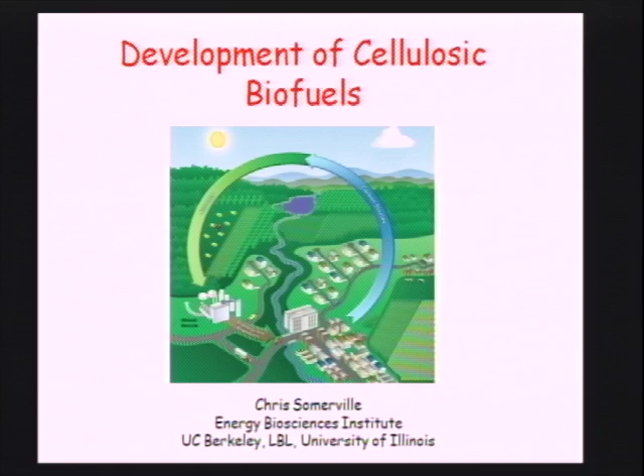All right, well, I'd like to just begin with an introduction to the EBI. EBI was founded here about 3 years ago now with a $500 million commitment from BP, and the organization from the founding involves 3 other partners, Lawrence Berkeley Lab, University of Illinois, and UC Berkeley. The mandate of the EBI is not actually entirely biofuels. It's broader than that, and it's to explore the application of modern biological knowledge to the energy sector.

And at present, when we began, we already had a pretty clear idea about cellulosic fuels, and that currently is the dominant thing we do. But we have other interests such as petroleum microbiology and biolubricants and biomaterials and pipeline corrosion and other things that we hope to eventually get to.

The EBI, although it was born in quite a bit of controversy here, has actually been a very popular activity when it comes down to participation. My administrators tell me that we've had 770 people on the payroll of the EBI in the past 3 years, including 150 faculty. So if we subtract 150 from the 700, I think that indicates there's about 100 undergraduates and about 400 graduate students and postdocs are or have been involved.

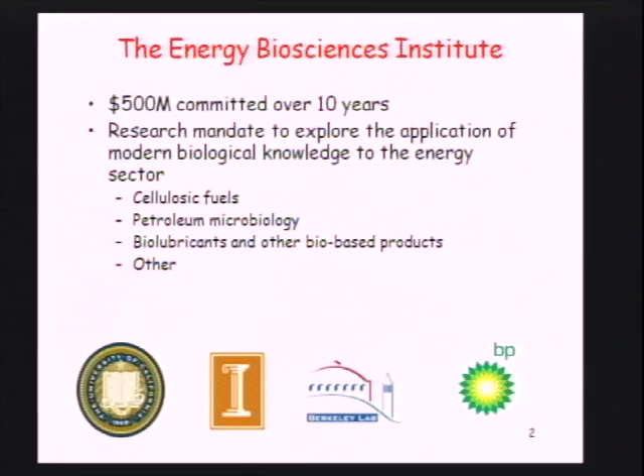So what I'm going to do is give you a little indication of a few slides about what our interests are and some of the things, but of course it's impossible for me to actually describe everything we're doing. It's quite a large activity.

One thing I can say, though, is strategically, and I'm only going to speak about the cellulosic fuels aspect of it, the way we've approached that mandate is that we could have focused on a few key issues and really put a lot of resources to try and solve the key issues, but instead, we've taken a broad view of the overall problem, or the overall opportunity, I guess I could call it. So we are trying to advance a whole system analysis of what might be involved in making next generation biofuels. So we have, as I'll show in a few moments, activities ranging from economics through agronomy and microbiology to chemical engineering.

I think I'll go through this somewhat quickly in view of some of the other talks, but I just did want to remind everybody that energy use is expanding very rapidly, and transportation, which is where fuels come in, is actually a fairly small piece of the overall expansion. It's just 20%. So whatever we do in terms of making low carbon fuels is going to be at most a 20% solution.

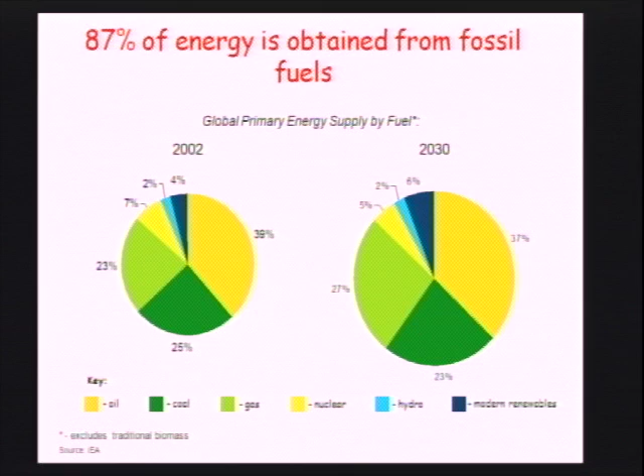This is actually the motivation. I think long term, it's apparent that as energy use grows, our solutions are going to have to include, to a large extent, solar solutions.

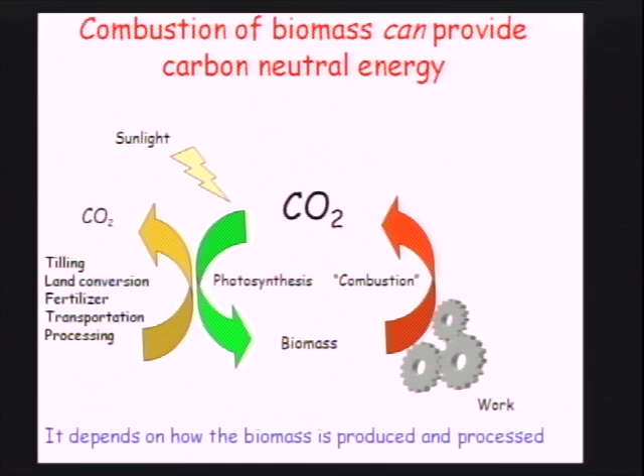So actually, it very much depends on how you do this as to whether it's carbon neutral or even a net gain energetically. And this is certainly one of the reasons why we have a pretty big activity in environmental and life cycle engineering.

So today most biofuels are made by one of two processes. The most advanced in some respects is the sugarcane process, in which sugar is fermented by the same yeasts used in the beer and wine industry for probably 5,000 years. And then the fuel is distilled to dry it and you produce a product. So Brazil produces today 40% of their transportation fuels on only 4 million hectares of land.

The corn process came along a bit more recently. 65% of a corn grain is starch, and that's just a polymer of glucose. So the process just has one more step, basically: the starch is usually gelatinized by boiling and then converted to sugar, and then the process is the same.

Those are mature processes. It doesn't mean there's not opportunities for some innovation there. For example, the drying is currently done by distillation, which is quite energy intensive. And it seems some of the things we work on may ultimately be relevant. For example, it might be possible to develop either liquid-liquid separations for constantly removing fuel from the fermentations, or some membrane process. There's various possibilities to improve some aspects of this.

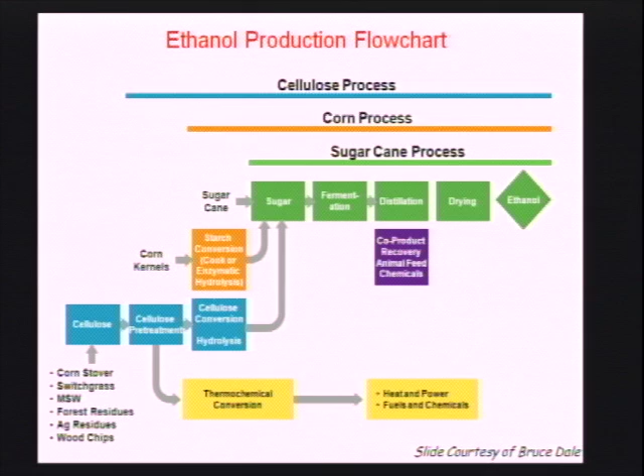Okay, so there's a lot of issues in this, and in the case of cellulosic fuels, probably the most controversial and in some ways the most challenging question is actually not this conversion process, since it's very similar to existing processes, but actually where one is going to get the biomass. And in general, this slide shows something a bit more complex, which is that, as I already mentioned, there's lots of complexities as to whether it's done well.

So in addition, the feedstocks is a big one. That is, depending on how you produce them and how much energy and other inputs go into the production and the transportation, you can either do it well or you can do it badly. There's a lot of discussion about that.

Obviously, agricultural practices trigger an enormous amount of controversy. Let us say the use of nitrogen fertilizer in the corn industry. A lot of that nitrogen fertilizer runs into the Gulf, creates a big dead zone. That's generally considered biofuels done badly. The question is, can it be done better? And so on. There's process optimization, obviously, greenhouse gas and energy balances, economic factors, and ultimately, you have to produce a fuel that meets the goals.

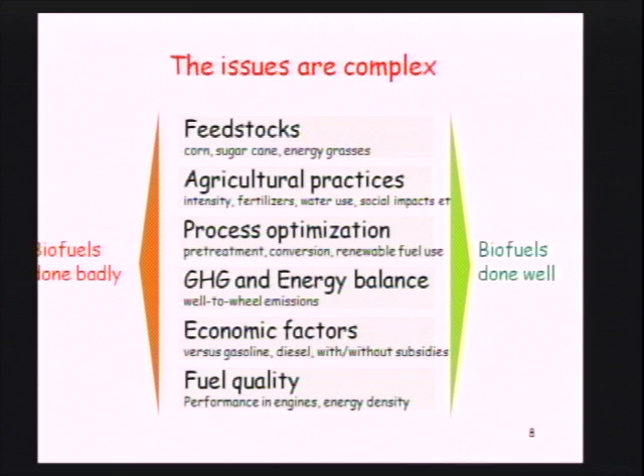And as you can see, probably that involves everything such as what we call biotic risk, that is, pests and pathogens, which can be very destructive. In fact, in Africa and Asia, about 40% of all agricultural product is lost to pests and pathogens. So that's an important efficiency factor that one might not normally associate with biofuels, but actually it might be a make or break as to whether biofuels can really work long run. And of course, there's all kinds of issues with transport and storage and related things.

Then once one has feedstock, the next bucket of problems is associated with converting the feedstock to something that can be subsequently converted to a fuel. So there's kind of two baskets of technologies associated with that. And so it leads to actually a very complex series of technologies that have to work together.

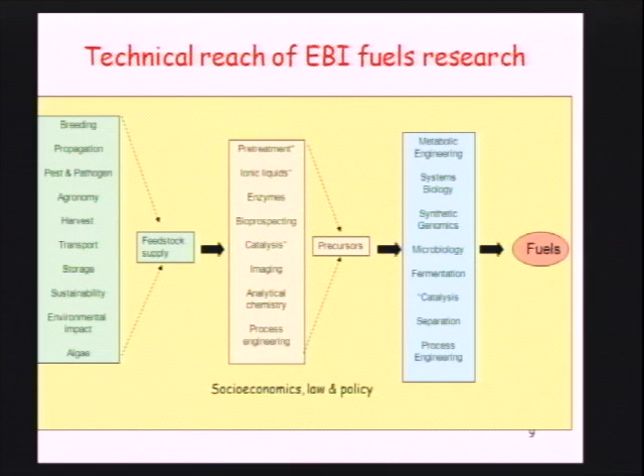That's a mile by a half a mile, where we've established large plots of candidate species ranging from mostly perennial grasses all the way to trees. And in fact, we have relationships with 30 botanical gardens around the world who are sending us candidate species that they think might be interesting.

Additionally, we have 19 more sites now around the United States where we're planting candidate species so that we can examine their production, the issues associated with their production, but also their biotic and abiotic stress responses and their effects on the local environment, including soil, water, and gas.

Now, there's many species that might be interesting. One of the interesting things about bioenergy is that unlike food, all food production in the world is based on 140 species of plants that we've adapted over some tens of thousands of years. But there's 250,000 others that we don't use for food. And one of the nice things about bioenergy is that when you stand back and look at it from first principles, all kinds of new species pop up with good properties.

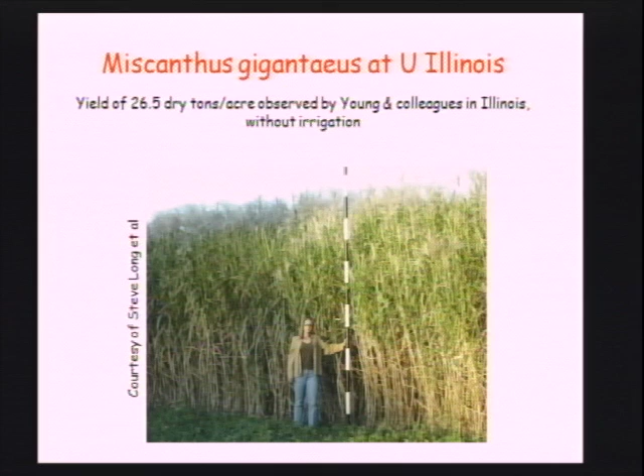It's cut every year at ground level, and on average we're getting about 18 tons per acre year with no inputs. So never been fertilized, never been irrigated, never been sprayed with anything, and shows no decline in productivity over that period of time. So this is very attractive to us for low input, high return. And we've invested quite a lot in this because it has a very broad range all the way from southern Canada to Florida.

This is a piece of data about Miscanthus in particular that's unusually interesting to us. What it shows is a 14-year study in England where there was no nitrogen, 60 pounds or 120 pounds per acre of nitrogen applied to the field, and every year all the biomass was removed from the plots. And you can see that over that period of time there was no response to applied nitrogen.

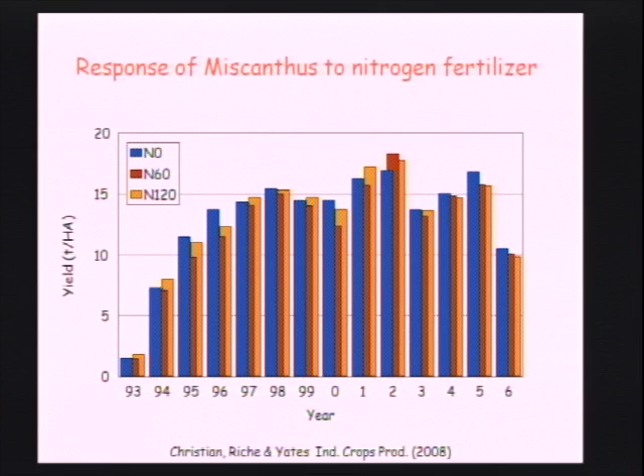And this reflects the fact that these perennial grasses have a growth habit that allows them to withdraw mineral nutrients from the biomass and store them in the ground in a big perennial root during the winter season. So if you simply wait until they've gone through that biological process before you remove the biomass, you don't remove the mineral nutrients, and they recycle each year. So environmentally, it's very attractive, and we believe very sustainable. There are plots in Europe now that are still yielding after 30 years.

To really understand the environmental constraints, we built the biggest and most comprehensive environmental monitoring system in agriculture anywhere in the world. So we have now at several sites, we're measuring pretty much everything that can be measured out in the field. That is all the gas fluxes, including methane.

Also soil temperature, moisture, but importantly, we've tiled fields and installed so-called lysimeters where we can measure the mineral nutrient efflux in the water table or in the drainage from these fields. And our goal in doing that is to understand the whole input and output of these systems.

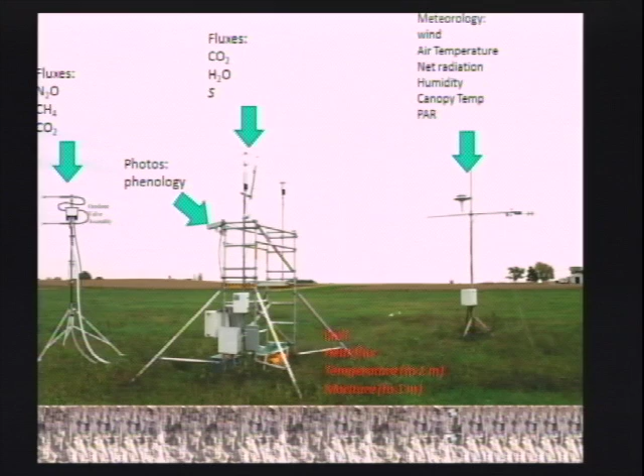And then we've planted all kinds of different potential crops on these fields. So everything from mixed prairie grasses to, we use corn as a control, something we know we don't want to use. So far, the results from these studies, mostly led by an ecologist named Evan DeLucia at Illinois, indicate that the perennial grasses are certainly very attractive in regard to soil carbon accumulation and lack of mineral nutrient runoff compared to conventional crops. So we think that all the evidence to date indicates that these are going to be sustainable and attractive relative to conventional crops.

And we actually envision them being used to remediate fields that have been farmed for a long time with conventional agriculture. I'm a little bit rushed for time, but I just want to point out that this is some data from Evan's studies showing that, for example, in this case, where grassland has been converted to switchgrass, their studies indicate soil accumulation increasing as the years progress. And in fact, we're doing these studies around the United States.

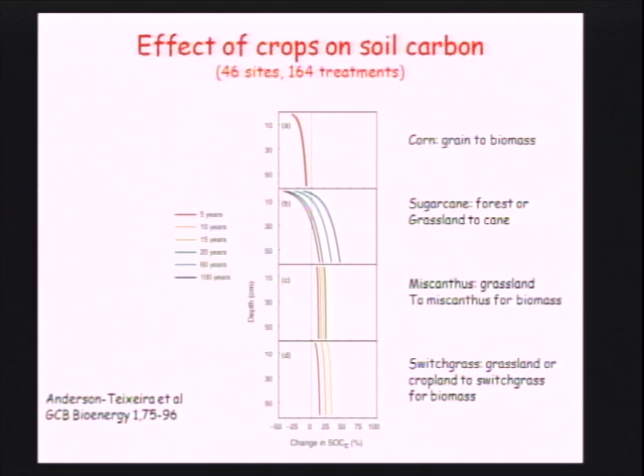One of the issues is whether there's land available, and our analysis suggests, well, I'm going to come to how much land is available. It appears to us that there's relatively large amounts both here and elsewhere in the world. So for example, in the United States, until very recently, we paid farmers not to farm 40 million acres as a mechanism to support the price of crops like corn and soybeans.

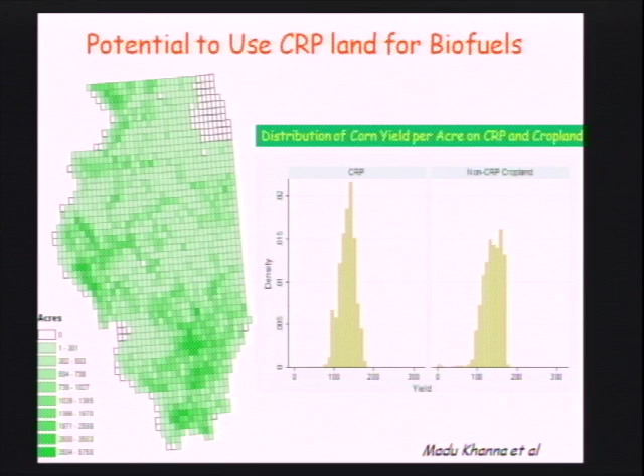And this land is actually highly productive, so there's a kind of a myth that somehow this is marginal land, and I just wanted to show that, for example, of the 1 million acres that we pay farmers not to farm in Illinois, the yield on those acres is about 127 bushels per acre versus about 140 for the prime farmland. So there certainly is quite substantial amounts of land available in this country, and I'll come to the world in a moment.

And in order to understand how much or which of that land might be suitable for us, an approach we've taken is biophysical modeling of candidate crop species. So we have highly parameterized models that use meteorological data, that is, insolation, water, wind, and temperature, as well as soil data. And we use 100 biophysical parameters that are able to model the growth of plants now very efficiently. So this is a model for

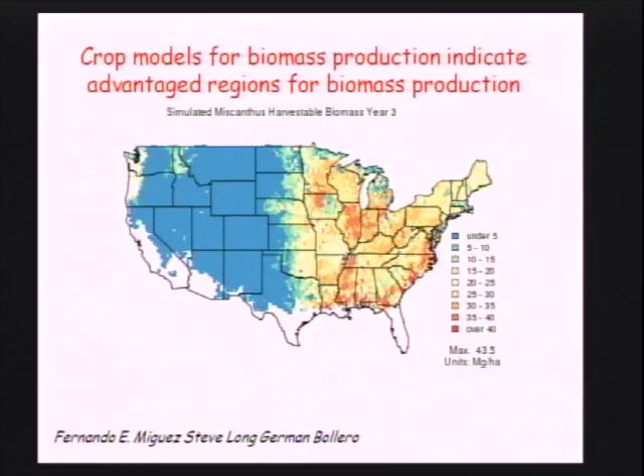Miscanthus, showing where the attractive regions are. And you can see, for example, along the Mississippi and in the southern states, it actually turns out to be very attractive. One really interesting thing is that you can see in Iowa, here it's very high, but here it's very low. So unusual, and we looked into that, and that turned out to be a place where the soil is rather shallow. And it turns out corn, which is the dominant crop there, thrives on shallow soil, but Miscanthus, as a perennial, has deep roots and doesn't thrive where the soil is shallow. It's kind of interesting. So anyway, this is very useful.

This model can be applied everywhere in the world where we're able to get the relevant meteorological and soil data. And it's very helpful for allowing us to see where the opportunities are and to estimate what the likely unfolding of the industry might look like relative to other demands for land and also relative to regional infrastructure and access to markets. In fact, we have a very large team of economists that take the data from the biophysical model and then build logistical and economic models on a spatial basis.

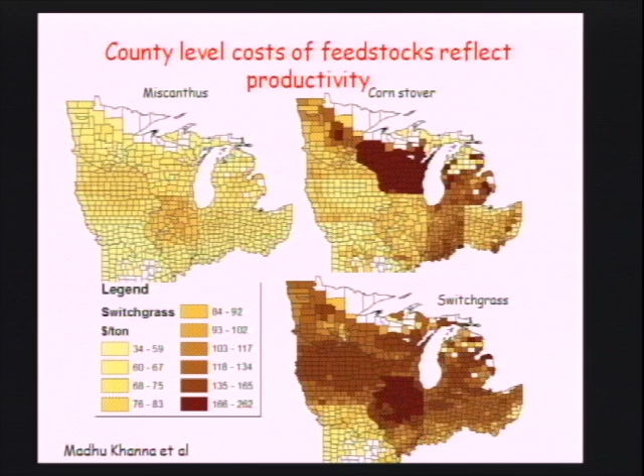Finally, in the context at least of economics, we have a number of economists and social scientists working with us also to understand the impact of devoting land for the production of biomass rather than food.

The long-term trend shown here in food prices is strongly downward, which is really a very important thing to understand, because from there to there, the world population doubled, and yet during that same period of time, all major commodities experienced a price decline. And that's related, of course, largely to improvements in both the agronomy but also in the genetics of the crop species.

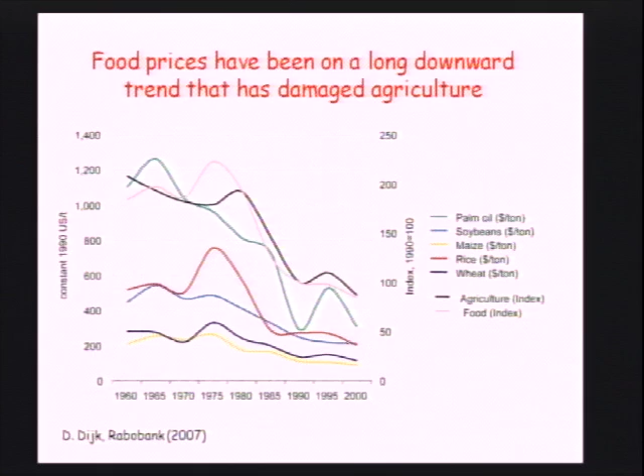So our big question is whether, if we start applying demand for land, that's going to impact this long-term trend and what the consequences are for at-risk populations. Our focus at Berkeley, at least, is not America. It's global, so we have similar questions everywhere in the world. We have particularly a focus on Brazil because it represents such a large opportunity.

In particular, as I mentioned, at present the Brazilians get 40% of their transportation fuels on only 4 million hectares of sugarcane. But the Brazilian government recently announced that they would allow the sugarcane to expand to 64 million hectares. So that will take Brazil, if and when they do that, to producing 400% of their transportation fuel. So Brazil, just on that basis alone, will become a very large exporter of fuels.

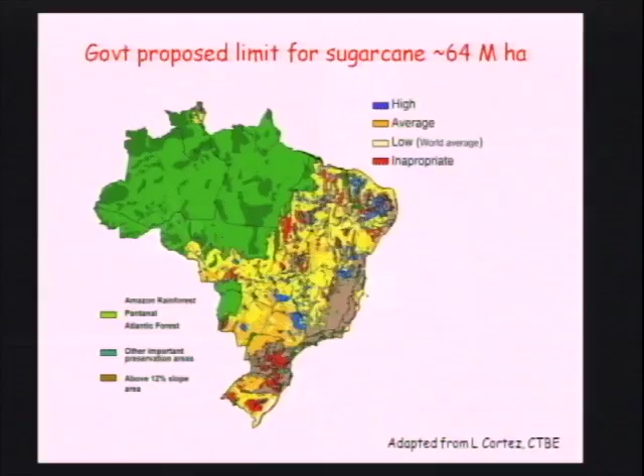At present, the Brazilians only use 14% of the mass of the sugarcane to make liquid fuels. They actually burn the rest rather inefficiently and export it to the grid to make electricity where they can. We believe some of the technologies that are coming along, and I think Jay Keasling will talk more about it than I'm going to, will allow us to actually use at least double that. So we believe in the long term Brazil could produce at least 800% of their demand for fuel.

Now, it always raises a question as to, well, is that going to impact the forest? And in fact, we have teams of students working down there because we don't think so. It turns out there's 234 million hectares of cattle ranching in Brazil. And in general, the cattle is at very low density, perhaps at least fivefold below the carrying capacity of the land. The Brazilians have used cattle to actually claim land during the land grab.

And so we're studying what's required to intensify cattle production to make land available for this projected expansion. And indeed, the government's designation of the 64 million hectares is based on that concept rather than further expansion into the Amazon. These are not things we're participating in. We're just trying to understand it as a factor in understanding the long-term trend.

More generally, some work from Chris Field's lab a year or so ago showed, based on some satellite imaging they did of land use around the world, that there's about 1 billion acres of agricultural land, land that has been used for agriculture, that has been subsequently abandoned. And there's all kinds of reasons for it. In some cases it's desertification or water problems. In the United States, it's mostly economic reasons for the abandonment.

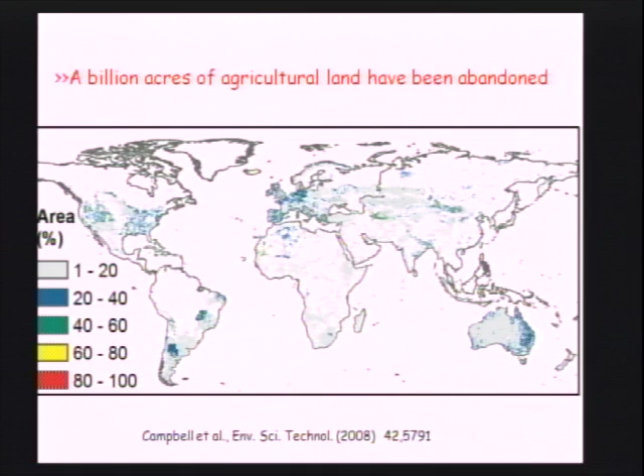Nevertheless, we're also trying to now get higher resolution understanding of where this land is, why it was abandoned, and what it means. And it's particularly attractive to us because where the land has already been used for agriculture, several things have happened. One is, in general, the carbon costs have been paid. That is, the carbon debt associated with converting an acre of native land to an acre of agriculture was paid sometime in the past. And secondly, in general, that land is not significantly required for biodiversity or ecological activities. Not always true, but it does indicate somewhat the scale of land that may be available. So we'd like to understand that in more detail.

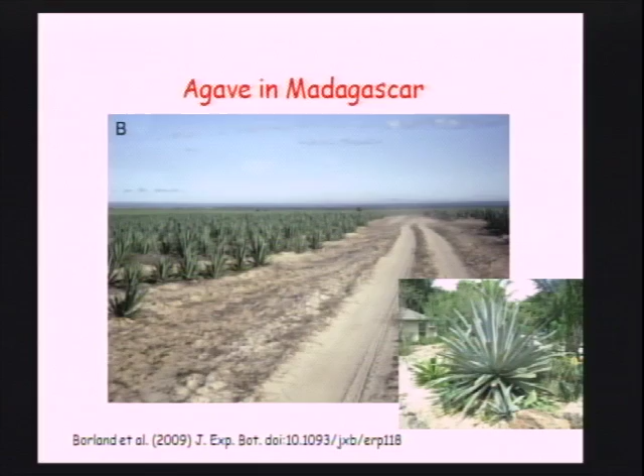Additionally, there's 5 billion acres worldwide that's too arid for agriculture. And so we've become interested in species that will grow on semi-arid land. So this is a very common plant around the Bay Area here, various species of agave. It's usually Agave americana here in the Bay. These species will yield about 10 dry tons per hectare a year on 30 centimeters of rain. And, as you know if you just look at the plants in our neighborhood, they will survive from approximately April to November without rain, extremely drought hardy.

So we actually believe these types of species may be suitable for energy plantations. This is actually a plantation used for making rope. This is Agave sisalana in Africa. So there's about 1 million hectares worldwide of several agave species. So we think that there are options in terms of land. We have not as yet tried to even identify an actual number as to how many gallons of fuel we could make with the land that seems suitable to us by environmental and societal criteria. But right now it seems like there's a very large amount, and so we're progressing.

I think I'm running out of time. How much time do I have? A couple of minutes? Okay, I'm really running out of time.

Well, we're working on storage and transportation. That's highly relevant.

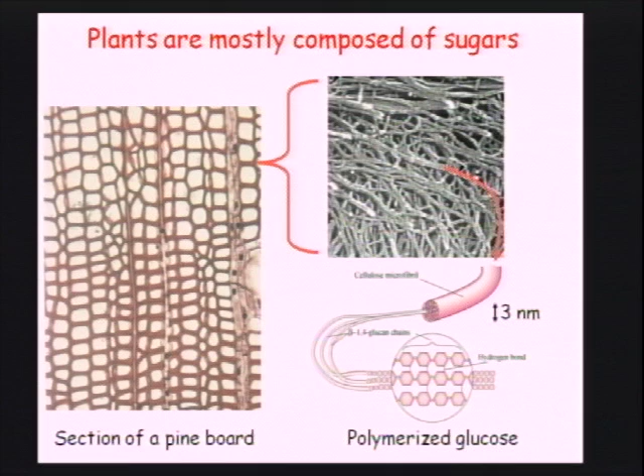Let me just say, of course, we have a huge activity in trying to understand how to convert biomass to fuels. And this turns out to be, at one level, straightforward. As I mentioned, the dominant components of biomass, if you look at it up close, are these large fibrils of glucan. Turns out these are very hard to break down enzymatically. The linkages are recalcitrant. So we've been taking all the usual approaches, exploring, looking for new enzymes.

And one of the groups in the EBI, Eddie Rubin and a couple of students or postdocs, I think for this project alone, sequenced 280 billion base pairs of DNA. They discovered 27,000 new enzymes for which they have full-length sequence, 27,000 enzymes that are relevant to biomass depolymerization based on similarity to other enzymes.

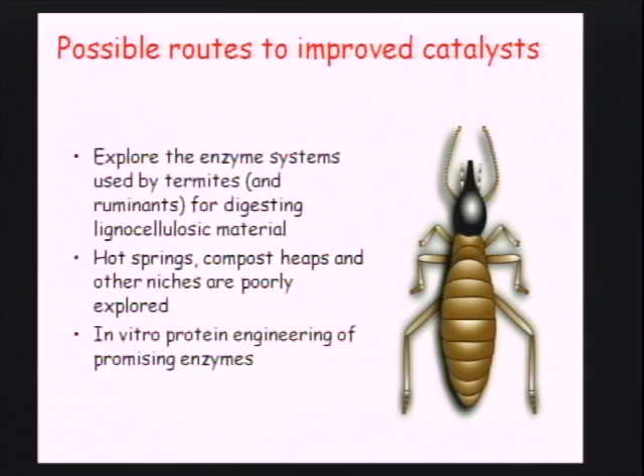And actually, now our challenge in that program, we think, okay, we have enough diversity now. They increased the world knowledge of cellulolytic enzymes, or actually carbohydrate active enzymes, by about 35% themselves. And that was just from one cow rumen. It's kind of interesting, the diversity in one cow rumen, 27,000 novel carbohydrate active enzymes.

So now our task is we're trying to work through that and devise intelligent ways to parse that extreme amount of new information into some new understanding of what I would call the catalysis space, how much interesting diversity is present there.

Alex is going to talk about ionic liquids, so I just want to talk about the other remaining challenge. One of the other big challenges we have that we're making some progress on is that biomass is not just made of cellulose, but actually it has a large component of hemicellulose that's made of a sugar generally called xylose, and none of the industrial yeasts currently used will use xylose.

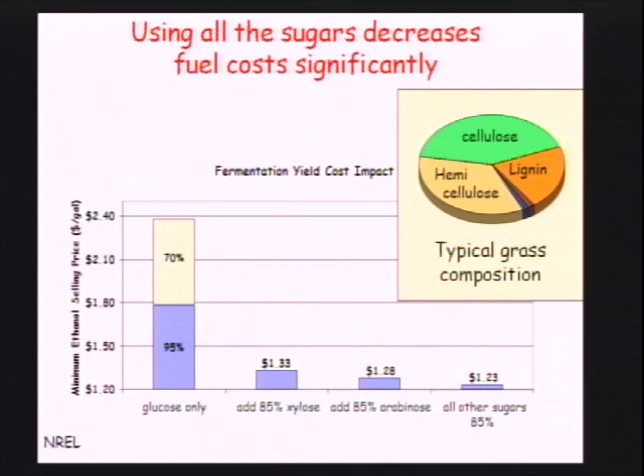So if you look at the cost of making a gallon of cellulosic ethanol where you only use the glucose, NREL calculates it's about $2.40 a gallon. But if you could use most of the xylose, you knock almost $1 a gallon out of it. And that's the scale of effect that we're quite interested in. And so we have colleagues in the organization in EBI that have engineered yeast to use other sugars besides glucose.

And some of the results that have come out of this are very satisfying because of the way in which we've made the discoveries. So this is actually from one of Jamie Cate's recent papers in Science, reporting on the discovery of a transporter that, instead of taking up hexose, actually takes up oligosaccharides.

And what this is reflecting is biomass is degraded by glycosyl hydrolases to oligosaccharides, and then by a beta-glucosidase to glucose, and that's taken up. And so in the discovery of this class of transporters, he completely removed the need for this pathway. And it turns out this is 30% of the cost and 30% of the volume of the enzymes that are used to break down biomass. So even on the basis of that discovery, getting rid of that requirement turns out to be a very, very useful result.

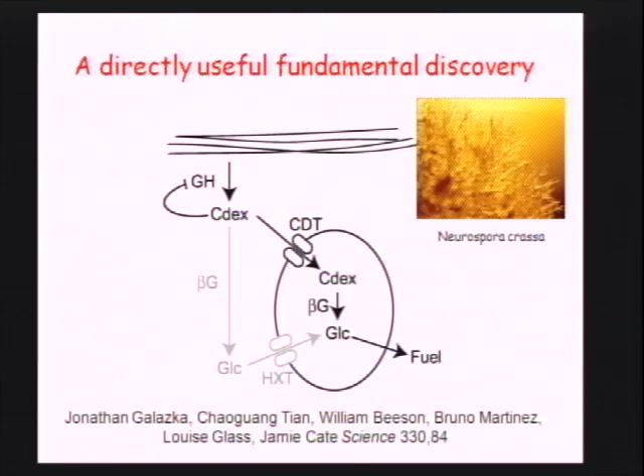But the thing I wanted to say about it was the way in which the group found it, and it's something like this. We have within the EBI a group that's taking a purely scientific, curiosity-driven approach to the question of how do filamentous fungi, like Neurospora crassa, grow on biomass? After a forest fire, the first thing that grows there is Neurospora, and so the group, about 11 faculty members and students and postdocs, has gone in and simply asked the question, what is every protein made by the organism when it grows on biomass doing?

And the transporter popped up from that kind of systematic analysis of how the organism grows on biomass, rather than necessarily trying to solve a specific problem in the overall biofuels chain. And I think what we put in place that enabled this was we have, around this kind of basic science group, a group of engineers and people who are knowledgeable about the actual processes involved in making biofuels, who were able to spot interesting discoveries as they've come out of this thing.

And so I like it as an example of how I think we can bring really great academic basic research to bear on the problem. That is, what we're trying to do in the EBI in summary is support great basic research, but have it aligned with a group of analysts, you might say, who know what might be useful for the full range of problems associated with making cellulosic fuels. And this is for us an iconic worked example.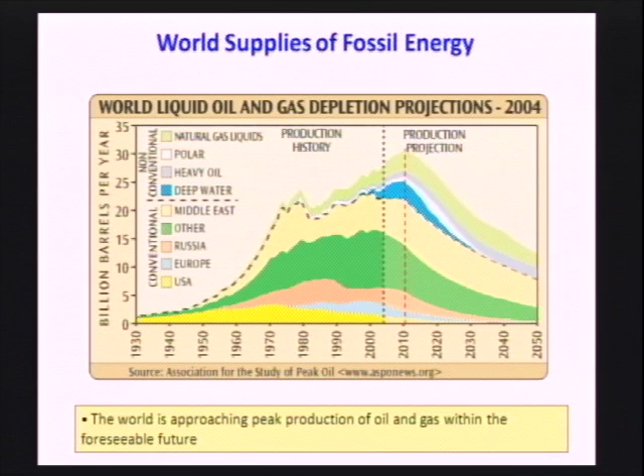So the point is that the traditional sources of carbon and energy stocks that we have used for nearly 100 years will face decline. And it's been estimated by Jeff Sirrola, he's a corporate engineer at Tennessee Eastman. It's one of the few companies in the US that uses coal in a large degree to look at producing chemical products like acetates, cellulosic acetates. And he's estimated, using the recoverable carbon resources that we have, the traditional ones, how long would they last?

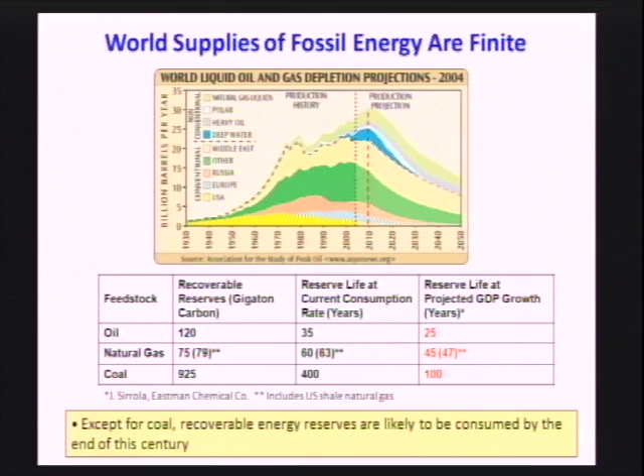And what I want to draw your attention to is the third column here on the right, which looks at the projection based on an expansion in the population and expansion in nations using energy. And so you can see that oil is expected to run out in 25 years, give or take maybe 5 years, natural gas in 45 years. The quantity in parenthesis accounts for the recent finds of gas in shale, mostly in the US. Coal here is now only good for a century because of the very rapid use of coal, expanding use of coal in China for electrical energy and other purposes.

So here's the summary. We've been good using oil, gas, and coal for over 100 years. These have been the traditional sources of carbon for fuels.

In the interim, tar sands, shale, and coal, roughly in that order, will be used for the same purposes. They're kind of a bridge. But these first two categories are not sustainable sources of energy or fuel stocks. Once we've used them up and once we've burned them, put the CO2 in the atmosphere, that's it. They're gone forever, as far as we're concerned. It'll take another 1,000,000 years before they're recaptured.

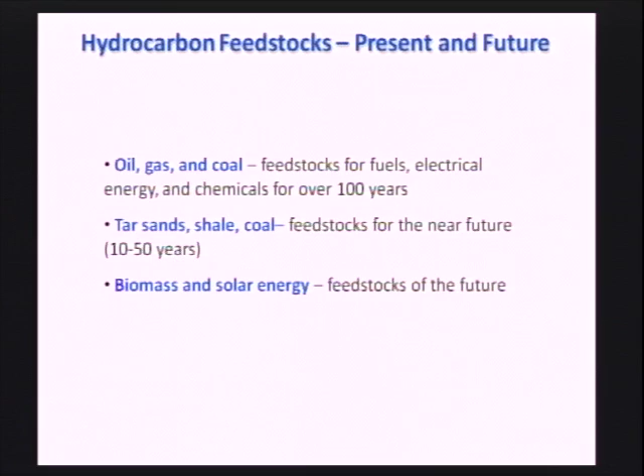Biomass, though, used in a strategic fashion, together with solar energy, has the opportunity for being sustainable. So what I'd like to do in the balance of my time here is guide you through the concept of using biomass to produce transportation fuels. So the basic idea is that we'll let nature take CO2 and water, photons from the sun and convert it into this group over here, which looks like formaldehyde to the chemist, or you can think of it as carbon plus water, i.e. carbohydrate, and it releases oxygen into the atmosphere.

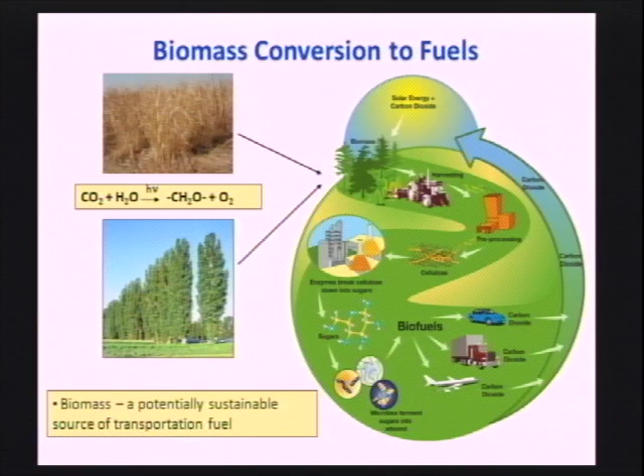So grasses and trees will do this. And what we'd like to do is take this biomass and by one means or another convert it into biofuels, which then are used to fly planes, drive trucks, drive cars. All of it ends up as CO2, but that goes back into the atmosphere and the cycle is continued. Is there enough in the US? Well, Chris Somerville has shown you a map of the US suggesting that there is.

Here's a different form of the map from the Department of Energy, which identifies various zones within which certain kinds of biomass grow. And the ones that look particularly attractive are in red boxes, so switchgrass here, hybrid poplars, Miscanthus that has been mentioned, switchgrass again, because these grow with good yields per hectare of land, minimal resources for water, and practically nothing in the way of fertilizer.

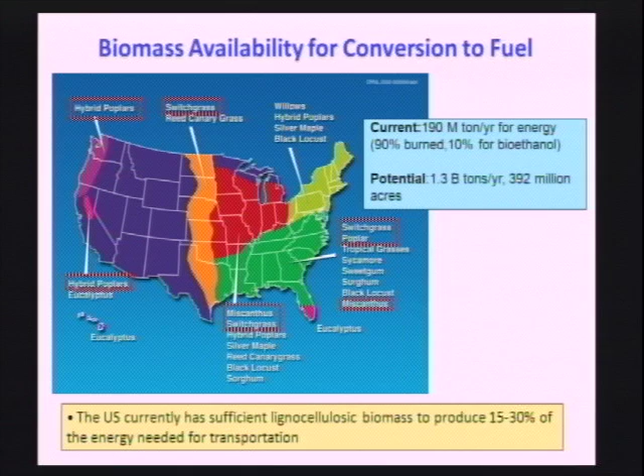So today, the US produces about 190 million tons per year of biomass, which is used for energy. Most of it is simply burned. 10% of it is used to make ethanol. But the potential is roughly 6 to 7 times that. So there's a lot. And the DOE estimates that if we were to use this biomass without growing more, there'd be the potential to produce maybe 15 to 30% of the transportation fuels. Remember, in the morning we heard that 60 to 70% of our transportation fuel, i.e. petroleum, is imported, so we could cut that down perhaps by a third to nearly a half.

Biomass, as I'll show you here in the next few minutes, is very different from transportation fuel. So let's take a minute to walk our way through the structure of biomass. So here's a wild grass growing over here. Here are the plant cells. And as you dig deeper and deeper under the microscope and look at what's in the walls of these cells, you'll find, first of all, these glucose units. They look like gumdrops over here that are connected together into a polymeric structure. This is called glucan. That's shown over here in the chemical structure. And these then crystallize into these strands. And Chris showed you some of these strands from a micrograph towards the end of his presentation.

These are surrounded by hemicellulose, another biopolymer, which I'll show you in a moment. And finally, all of that is wrapped in what I call a wax wrapper, because it doesn't look like a carbohydrate. It's more like a hydrocarbon, and that's the component known as lignin. So here is the structure of the glucan strands, several of them, crystallizing into cellulose. It has a hydrogen-to-carbon ratio of 2 and an oxygen-to-carbon ratio of 1. And I'd like you to keep that in mind.

Here's the next level of structure. Here's the hemicellulose. It's a different kind of a sugar. It's a 5-carbon sugar, mostly xylose. It's connected chemically by these ester linkages to a fragment of the lignin, but the xylose also looks like a carbohydrate, has about the same composition as glucose.

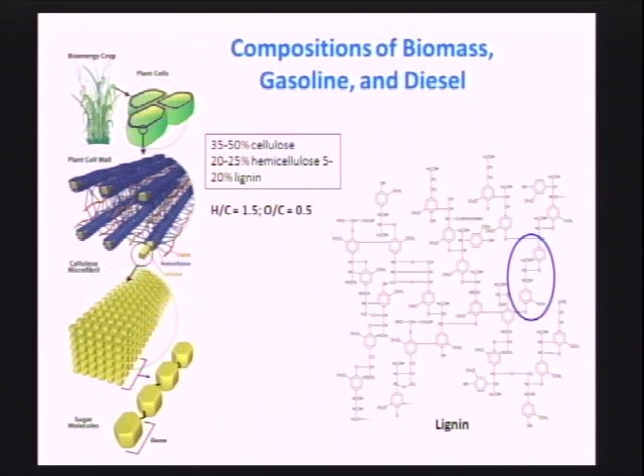And here's what I call the wax wrapper, lignin. If you look at this structure and you were to look at the structure of lignite, a young coal, they're very closely related. It's an aromatic structure, single aromatic rings with these glycerol-type structures bridging between ether linkages. There's no unique structure here. It's a polymer, highly cross-linked, and what it does is give the plant its stiffness and allow the plant to grow vertically up towards the sun.

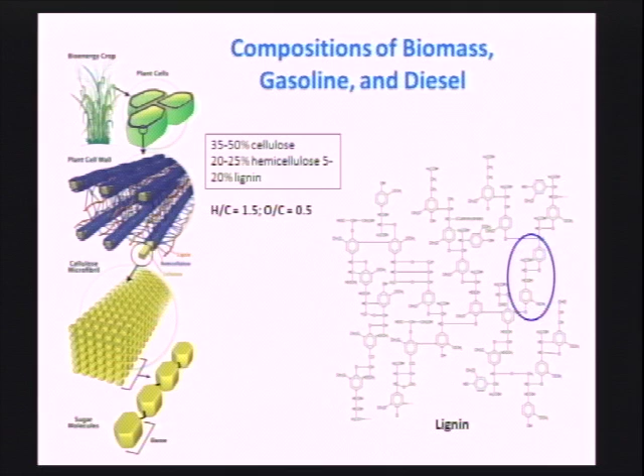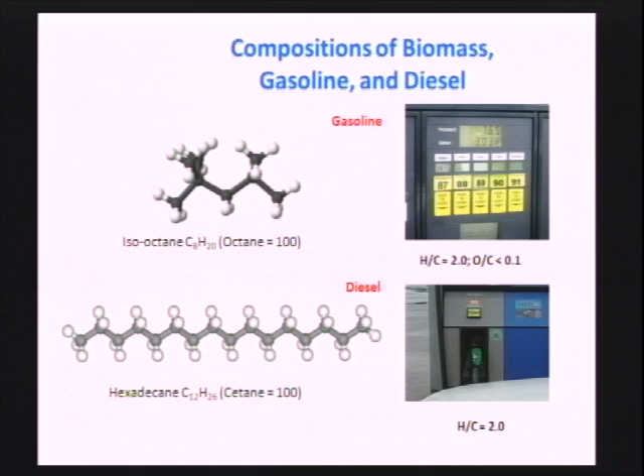But it's a hydrocarbon. There's carbon. These white balls are hydrogen, and it's a branched hydrocarbon. Diesel fuel, on the other hand, wants to be a long, straight-chained alkane. Here's hexadecane, 12 carbons, 26 hydrogens, and it's the gold standard for cetane number. That has a cetane number of 100.

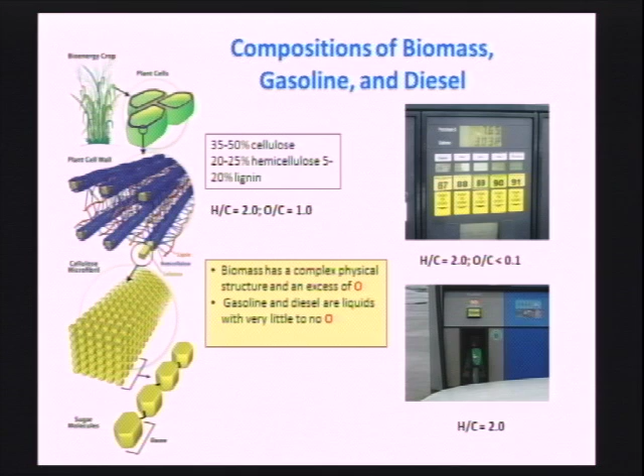So what we're trying to do is take this complex structure and turn it into these simple liquids. These are solids to begin with. These are liquids. It turns out that here, the hydrogen to carbon ratio is the same as here, 2 to 1, but there's practically no oxygen except for the ethanol that's blended into gasoline by law. Diesel fuel has no oxygen. It's a pure hydrocarbon 2 to 1. So clearly, biomass has too much oxygen in it, and in order to get from here to there, we have to take oxygen out.

Why so? Well, we would like to have a high energy density in our transportation fuel. You'd like to be able to drive a long distance on a liter of the fuel you put in. So here for reference is gasoline, 35 megajoules per liter. It has no oxygen to speak of. By contrast, at the bottom of the list, if you were to think of glucose as a liquid, I know it is not, but let's think of it that way, it would have an energy density of 14 megajoules per liter. It has 6 oxygens per 6 carbons, so it's at the bottom of the heap. It's partially burned hydrocarbon. You can think of it that way.

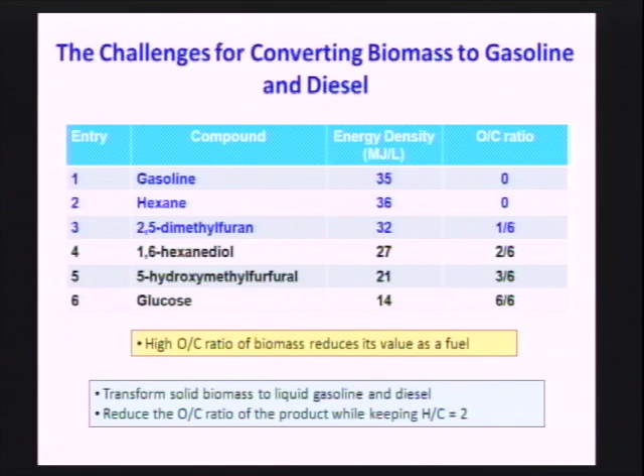As you go up the list and you remove oxygen progressively, you can see the rise in the energy value or energy density of the fuel. So one wants to go from here to there, and that means that we have to end up taking out oxygen from the biomass.

Now, I mentioned at the beginning that there are lots of different strategies for converting biomass into the final fuels. So one can take the cellulosic biomass, enzymatically break it down into the sugars, the C6 and C5 sugars, ferment them, and produce ethanol and butanol, and there are even options for producing alkanes. And Chris has talked about this, and Jay Keasling will talk some more about it.

Another alternative is to add steam and some oxygen and convert all that nice structure that nature made into a mixture of CO and hydrogen, and basically start all over by putting the carbon and the hydrogen together, throwing away the oxygen as water. And that will be done by Fischer-Tropsch synthesis, methanol synthesis, or water gas shift process if you want to make pure hydrogen. That involves chemical catalysis.

Another alternative here is to pyrolyze the biomass, which again breaks down all of the structure that nature put into it and produces a bio-oil, which contains chars, alcohols, aldehydes, ketones, aromatics. It's a dog's dish of molecules. And initially, it is quite corrosive and unstable, but if you add hydrogen or take oxygen out, you can create a synthetic oil that can be blended in with petroleum and co-processed. So that's attractive.

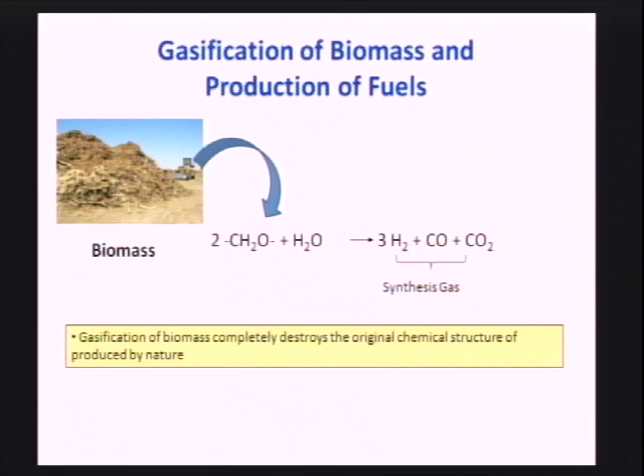So here's what nature does. It produces biomass. One then adds steam at high temperature and takes this basic building block and converts it into a mixture of 3 hydrogens, 1 CO, and you throw away some carbon as CO2. This middle part is known as synthesis gas. But of course, we're completely destroying the chemical structure that nature produced by doing this. The next thing you do is you do this in a large vessel, and I'll show you what a plant looks like in just a moment to produce the syngas.

It's quite dirty coming from biomass. You have to clean out the chars. You have to clean out the inorganic materials that come with the biomass. So there's a lot of cleanup that's done, but it can be done. And you then have a CO and hydrogen mixture that you can combine, make the basic building unit of alkanes, this methylene unit, CH2, throw away the oxygen as water. You can co-produce electric power, so that's good. So you're using your biomass for more than making transportation fuels.

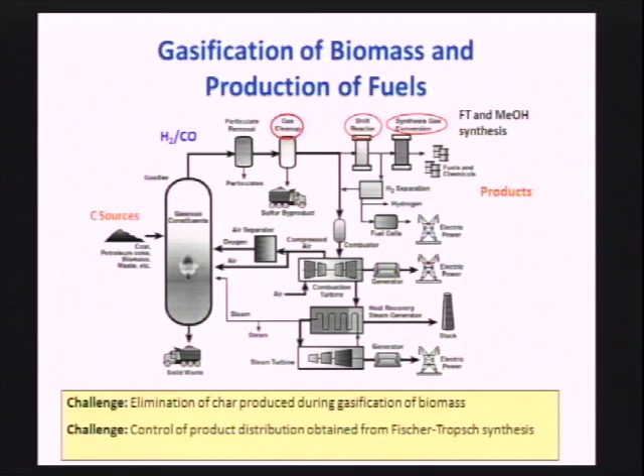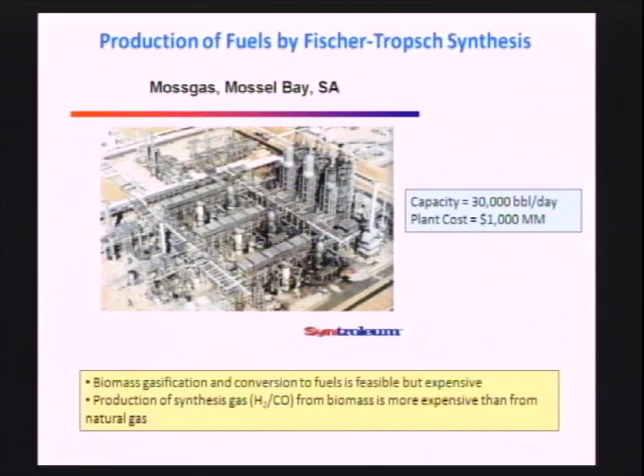So if you want to replace the Chevron refinery with something similar to what the South Africans have done, this is a $1 billion investment. And you don't have to do it once, you have to do it multiple times. So this is expensive technology, and it's made more expensive by the fact that the biomass gasification is more expensive per unit of synthesis gas than it would be if you were using natural gas as the starting material.

Well, it turns out that in the last 6 years or so, it's been discovered that ionic liquids, a rather exotic type of solvent, will dissolve virtually every component present in biomass. So what's an ionic liquid? It's a salt made of an organic cation, the positive charge, which is shown here, and an inorganic anion, for example, the chloride anion.

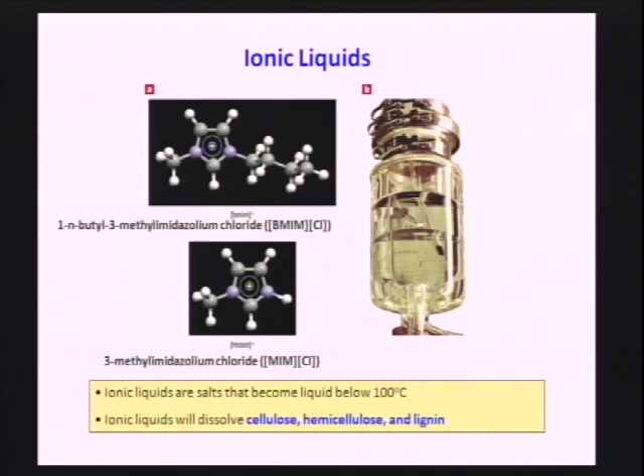And these are materials that become liquid at 100 degrees C or below. And that's why they're called ionic liquids. They're purely ionic. There's no water in them or anything else. But they're powerful solvents, and they will dissolve cellulose, hemicellulose, and lignin, the principal components of biomass. Why do they work? Well, we've been studying this, together with Berend Smit and Jhih-Wei Chu, doing statistical mechanical investigations of how ionic liquids interact with components in biomass.

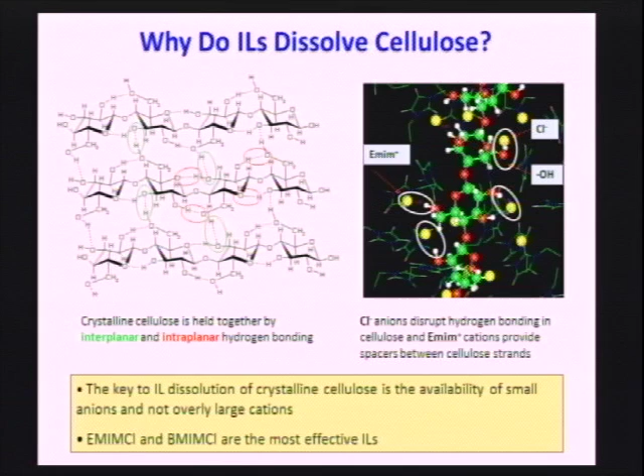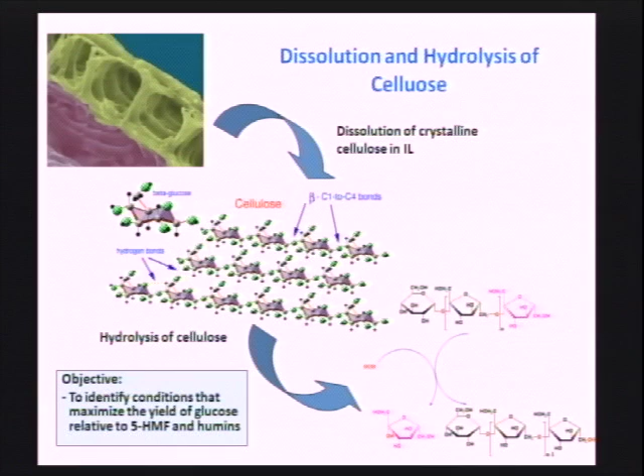So once we've dissolved the crystalline cellulose and gotten these glucan strands, the next thing to do is cut the ether linkages and release the glucose. And this can be done by adding water, just enough water to compensate for the breaking of the bridges over here. So we release the glucose over here. And that can be done with a variety of acids, even very garden variety acids like hydrochloric and sulfuric acid.

And here I show you an example of how far you can go. This is done taking crystalline cellulose, commercial name is Avicel, the catalyst is hydrogen chloride, the solvent is EMIM chloride, an ionic liquid. And you can get roughly 70% of the starting cellulose back as the sugar dissolved in the ionic liquid. There's a little bit of the dimer of that sugar, known as cellobiose, and there's just a trace, about 10%, of what is called HMF, hydroxymethylfurfural, which is the first dehydration product. I'll show that to you in a moment.

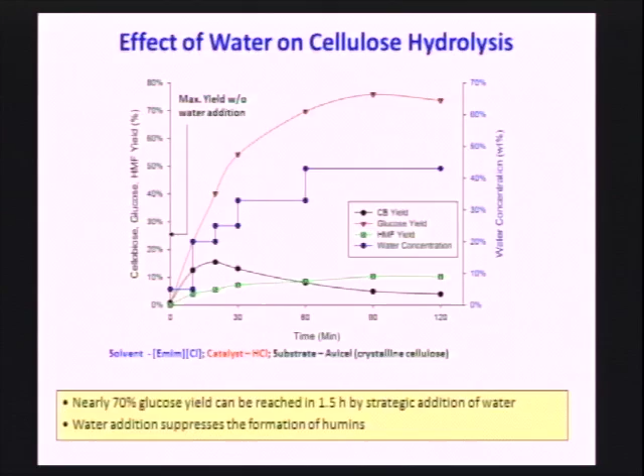So you can recover much of the sugar that is present in the cellulose by dissolving it and hydrolyzing it. You can do the same thing to the same extent using hemicellulose. In fact, recently we've discovered that we can take miscanthus in the form of very small particles that are ground up, throw it into the same ionic liquid, add the acid, and we can get glucose, and xylose and arabinose, the sugars that you get from hemicellulose and cellulose, a little bit of the dehydration products of each of these sugars.

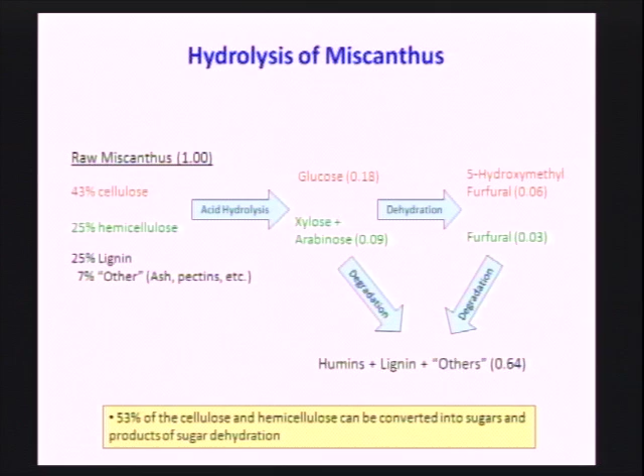The net effect is that until recently we could get 53% of the cellulose and hemicellulose that starts out in the material, that material right there, into solution. And today, by other tricks that we've learned to play, we can get this up to 70, and we're marching up towards 80%. So we can get a large part of the carbohydrate into solution.

Well, once you've done that and you have your sugar in the ionic liquid, what do you want to do with it? Well, obviously, there's too much oxygen here. You want to take that out. The easy thing is to dehydrate it, and that will happen spontaneously. The thermodynamics are very much in favor of taking out 3 of the 6 oxygens. So you get this product, 5-hydroxymethylfurfural, or known more familiarly as just HMF, with about 95% or better selectivity. So that's step 1.

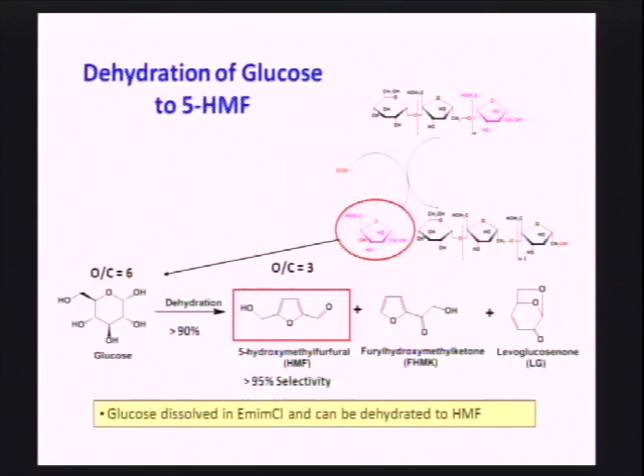But unfortunately, this is not a fuel candidate. It has chemical properties that are not compatible with putting it into gasoline. But you can start with that product, add hydrogen at elevated temperature in the ionic liquid, and take this product into a variety of products here, the most desirable of which is this dimethylfuran. Notice now I started out with 3 oxygens. I have 1 oxygen here. I started out with a ring over here. I've kept all the carbons in place. I didn't lose any carbon.

So why is this attractive? Well, if I look at my scale of energy densities, there's 2,5-dimethylfuran. It's just a tad below gasoline in terms of its energy density. It also happens to have a low vapor pressure, so it won't evaporate. It meets the specifications that way. It doesn't have any functional groups that will interact with the seals in your engine and cause them to leak, so that's acceptable. What's not clear is how safe is it to burn.

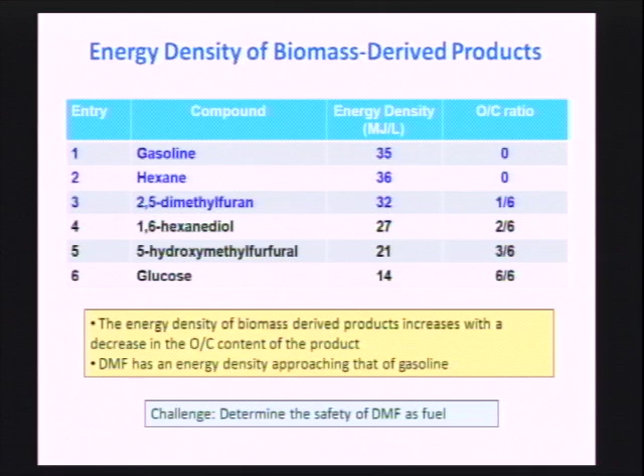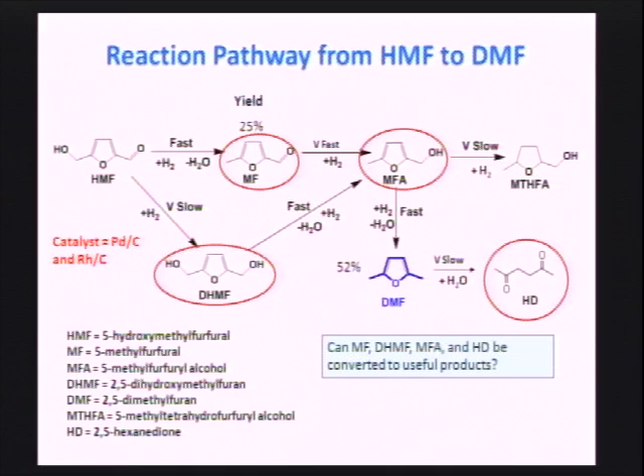It's not your garden variety fuel. Therefore, the energy companies don't know exactly whether it's toxic or not, or whether the products of combustion are toxic or not, and this is a subject that is being investigated. But there's a lot of interest in this material. Notice that there were other byproducts. Are any of them good for anything? Or should we just throw them away or burn them? Or can we produce something interesting from them?

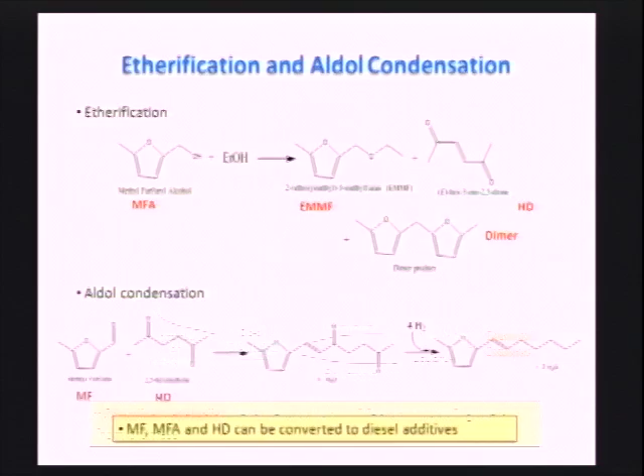So what I've shown you is there's a wide diversity here of approaches. I've only talked about two. One which is mature but expensive, another one which I will call immature, unclear whether the baby will make it all the way to the marketplace and be used, but if you don't grow babies, you never discover whether they're going to be geniuses and get Nobel Prizes. So we're growing babies and seeing what they mature into.

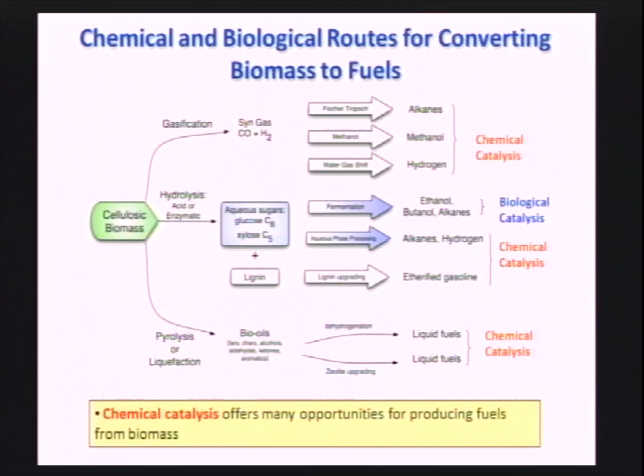So I'd like to end by showing that I've talked about this end of the cycle. In fact, this is the same picture that Chris used at the beginning of his talk about the opportunities for converting biomass into fuels. But there are other challenges. One is, how do you grow disease-resistant crops in a sustainable manner so that you don't disturb the soil, you don't release extra CO2, you use the minimum amount of water, preferably no fertilizer. And that can be done.